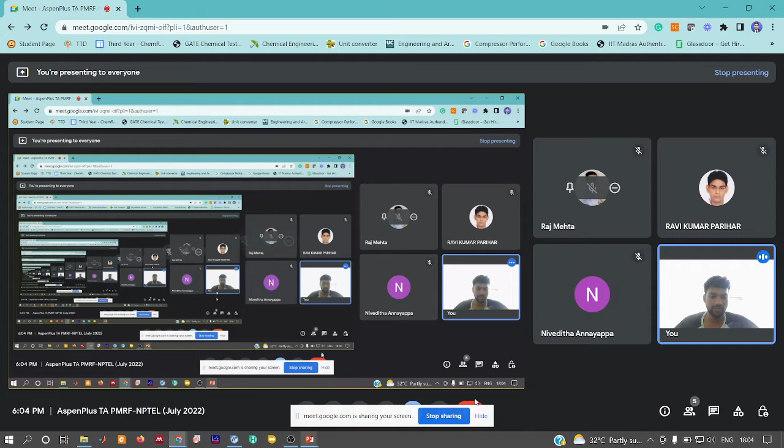Okay fine. So before going to the lecture, do you have any topic which you want me to discuss with respect to Aspen? Anyone? Do you have any specific thing which you want me to discuss? Any response? I see, if you don't respond, by default I'll assume that everything is clear and you are able to solve all the assignments fine.

That's alright, yes, so I'll just do what I had planned. So I welcome you to the seventh lecture of this interactive session. It will be good if you have Aspen with you now and are able to do it. I actually plan to take up the example where we stopped last week, the air separation plant, thought of continuing it, but in case you don't have it as of now, what I'll do is...

I'll just show you the procedure. Anyways, this is getting recorded, so later on as well you can try it out. So, regarding the assignment problem, someone says, when is the due date for assignment 2 or assignment 7? Assignment 7 - because I haven't actually seen these assignments, it's due tomorrow, right? So in that case I'm not allowed to discuss it, but I can discuss it the coming week.

So you have trouble solving those questions, or the question itself is wrong? What was the issue?

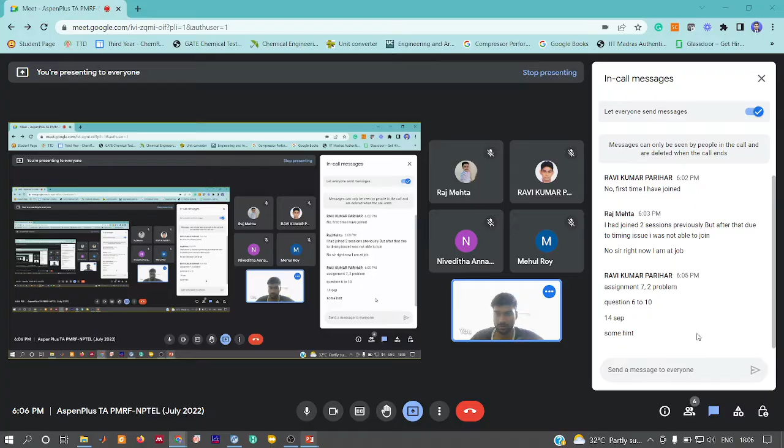So what the professor was discussing this week is he took 3 different problems, trying to show how do we simulate, set up the flow sheet, and identify the variables. In some cases it happens that we know the input of all the components. However, generally when you have the role of a process designer, your input is the required quantity from the process.

So let's say, for example, talking of the same air separation plant, I want 1 ton of liquid nitrogen per day - let's just assume the output is specified. Now for the given output, we need to design the required input conditions, flow rates, operating conditions, everything else. Although in most textbook problems the inputs are available, in real life we are only given the outputs.

So the professor started one way - he gave all the inputs and asked you to calculate the output. In some cases he used the concept of design spec and sensitivity analysis to find out how the output variables vary as a function of input variables.

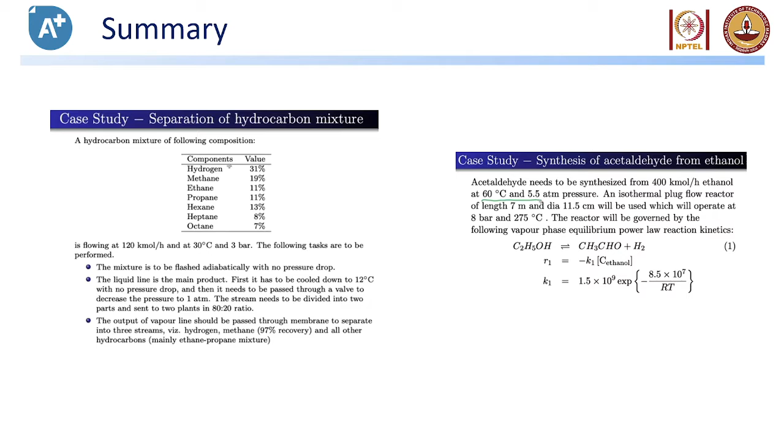So one was separation of hydrocarbon mixture, then preparation of acetaldehyde from ethanol, and another distillation process. That's what the professor has been discussing this week.

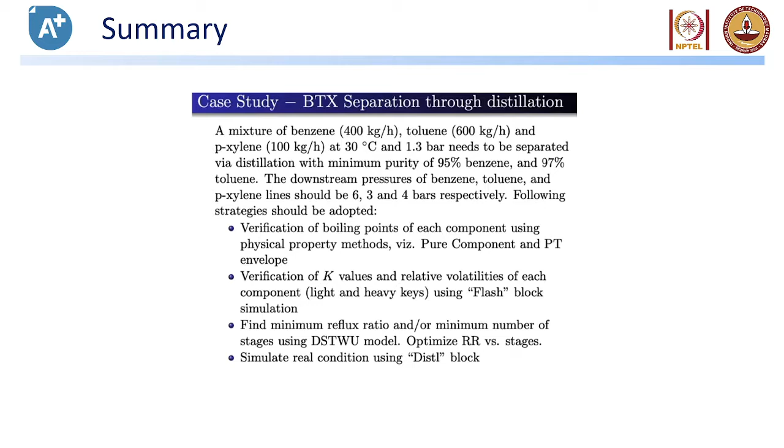So what I had planned was to have very few questions - these will give me a message that you are going through the lectures and are able to follow them. So I have one question. One of the concepts the professor discussed is membrane separation. I want you to answer whether Aspen Plus has an inbuilt module for solving membrane separation processes - true or false?

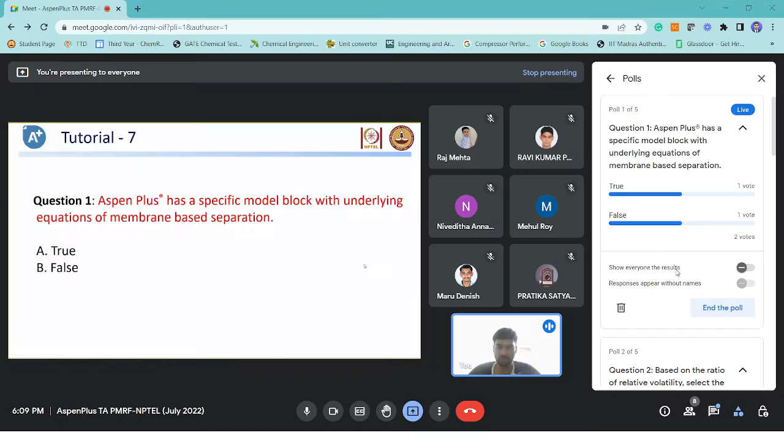Before actually asking this question, how many of you have used Aspen? Can you just put a text that you have used it and are using it often? Yes, someone is raising their hand - you can just put it on the chat box, whatever issue you have.

Okay Mr. Raj, you are using Aspen - so you are clear about the model palettes available in Aspen, right? Okay, thanks for your response. Others? Yes, okay, so only two of you - three out of six, only three of you are using, is it?

Okay, I'll just give you some brief introduction. For those who have not seen the Aspen GUI and all, when you go to the simulation aspect, you'll be able to see the model palettes over here. It can simulate mixers, separators - you can see over here - so separators will have phase separator, two phase separator, three phase separator, and a decanter based on density separation. Then heat exchangers, various kinds.

One is shell and tube heat exchanger, which can carry only two streams - that's called HeatX. The heat exchanger which can carry multi-stream, more than one hot stream or more than one cold stream - if you have such a system, that's called a multi-stream heat exchanger, MHeatX.

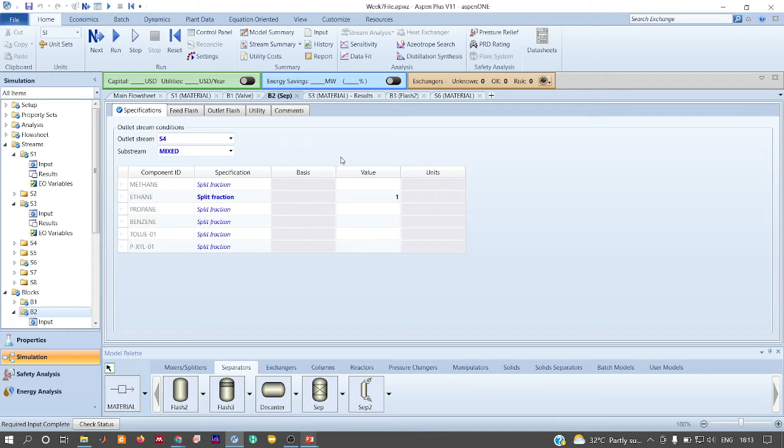So although Aspen has got tens of modules, it doesn't have a membrane separation model, right? Yes. So the answer is false. We are just physically giving it the separation and assuming that there exists a membrane which will give us that output. So it's all physically done. However, there is no mathematical model at the back of Aspen which can solve this membrane separation process.

Okay, fine. So I have another question. Whoever has Aspen with you as of now, I hope you should be able to answer this question. And by the way, I'm asking once again, does any one of you have Aspen with you now? Maybe one at least. Okay, I can see some of you. Wow, that's great.

Then in that case, can you just open the Aspen file and give me an answer for this? This gives you an idea of how we calculate boiling points of pure components. Can you just open Aspen and answer this question based on boiling point, basically volatility, right? So I'm asking, the boiling point is available.

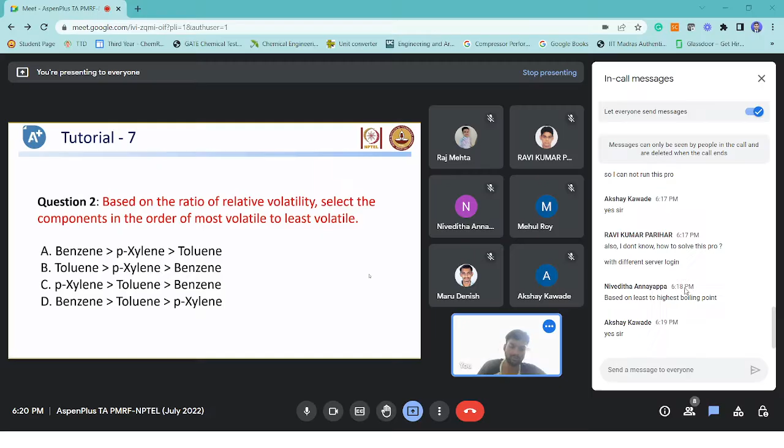Okay, fine. I'll just show you how we do this. See, once we define, the first step is to give the components, right? So see, I already gave the components: benzene, toluene, p-xylene, right? After that we specify the method we are using. It can be any method. As of now I'm using NRTL-RK, but it can be any other method as well, because it's just a prediction, right?

So now the next step: on the right side top you can see the pure component, binary, mixture, solubility, PT envelope, etc. Since we have only one component, let's try with pure. Now what do we want to measure? In this case we were looking for dew point, right? If someone is interested in finding density or volume, etc., you should be able to read the properties.

Once you put your cursor on the symbol which Aspen is using, you can read what it means. For example, mass density of a pure component, similarly isentropic exponent of pure component, mass enthalpy, ideal gas enthalpy, etc. So from this we will be able to calculate properties of different things.

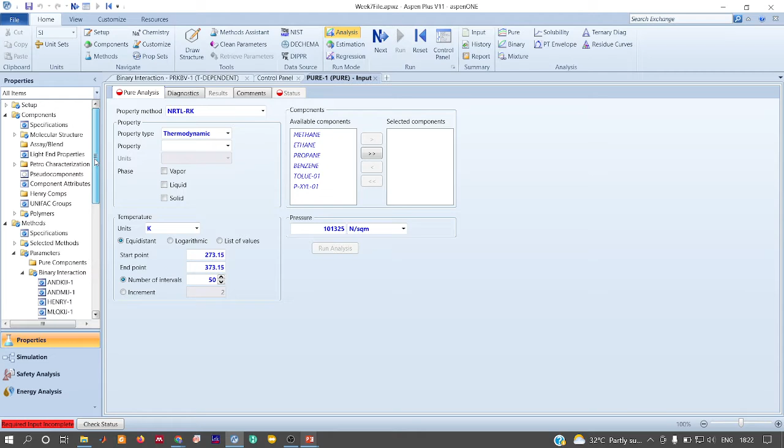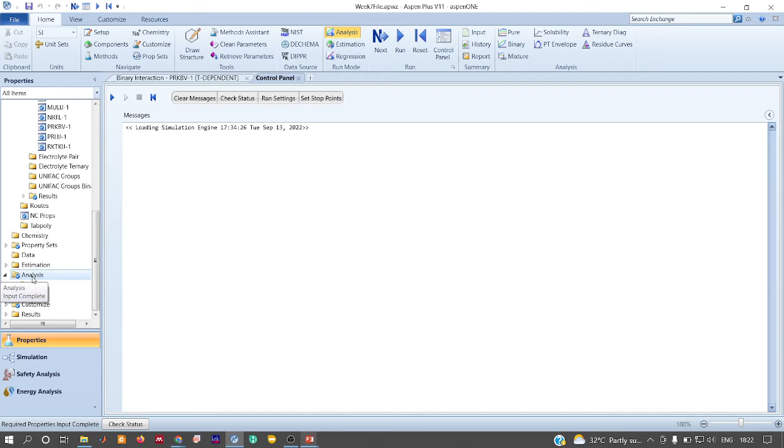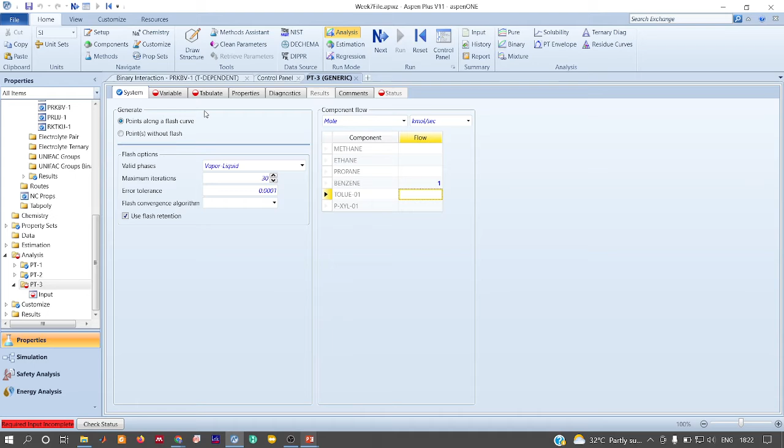However, now we are interested in finding out the boiling point at 1 atmosphere. So I'll show you another method. Let me just delete this pure analysis I have shown you; in case you want to find other properties, it will be useful. Just go to analysis, click on new. It's generic, right? Now it says I want only one. Essentially, giving a mole flow of 1 for benzene makes it a pure component. I want it at 1 bar.

I don't know who has unmuted, can you just mute yourself if you don't mind? Okay.

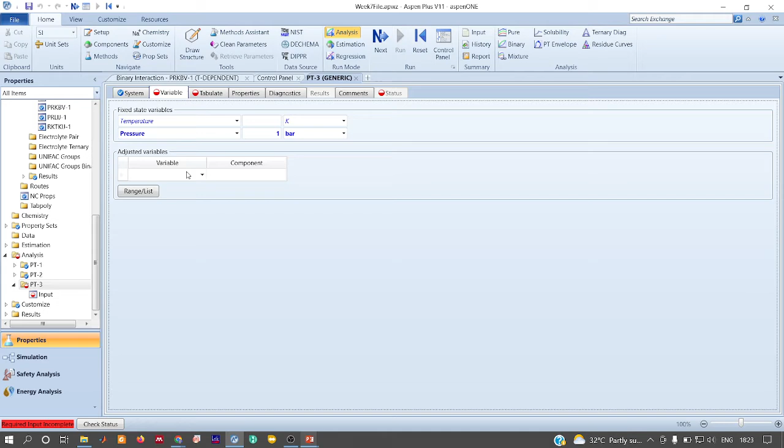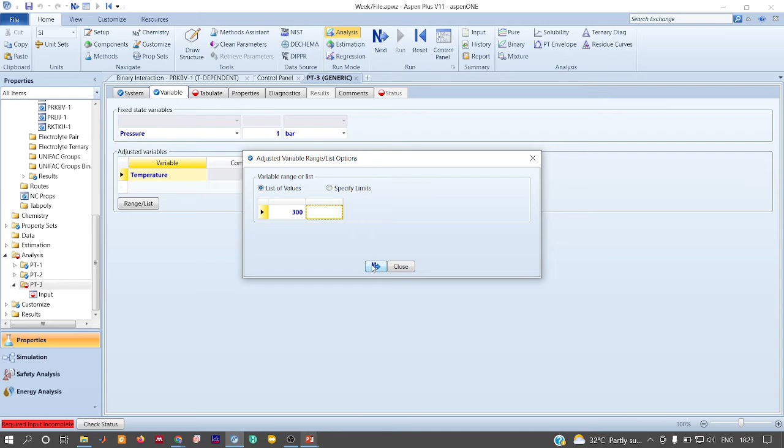So we'll vary temperature. This is just a dummy calculation. I'll say I want it from 20, let me put 150, also 300. Then what do I want to tabulate? The bubble point or dew point. For pure components it doesn't really matter, bubble point and dew point are the same. So let me just run this analysis.

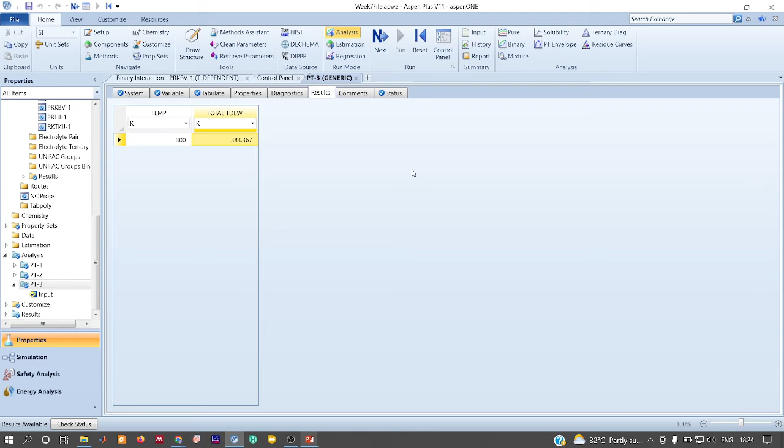See, here we can see that at 1 bar it has a dew point of 352 Kelvin. Similarly we can identify the dew point for others as well. If I remove this and put toluene and run it, now at 1 bar I have a dew point of 383 Kelvin for toluene, and similarly for the other component as well.

Let me delete the other, then run it. See, I have the third one as 411 Kelvin, right? So now I have 3 component boiling points. Since I know the boiling points, I should be able to arrange them based on volatility.

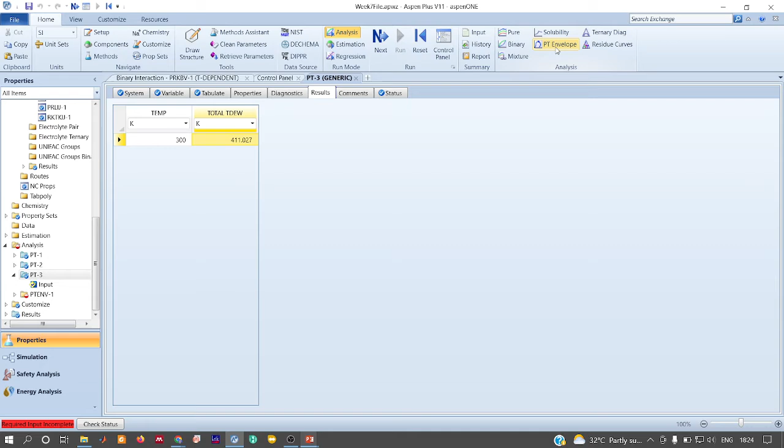Another way of doing it is just to generate this PT envelope. Say I want to generate a PT envelope, I want only this one. I would prefer using the density matching method. Since it's from our own lab, I know what is going on with the density matching method, so I prefer using it.

Once you see the results, it gives you, not dew point, since it's a pure component, it says saturation temperature at various pressures. Since we want it at 1 bar, 1 atmosphere, we can identify that it's 353 Kelvin. So this is another way of doing it. Could you follow what I did for finding boiling point or dew point?

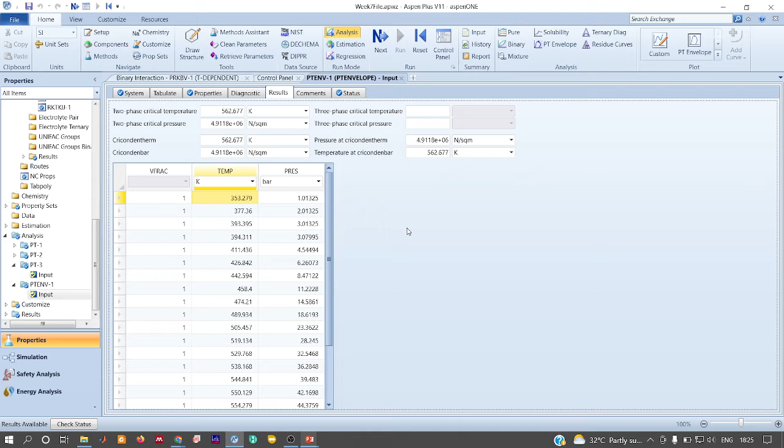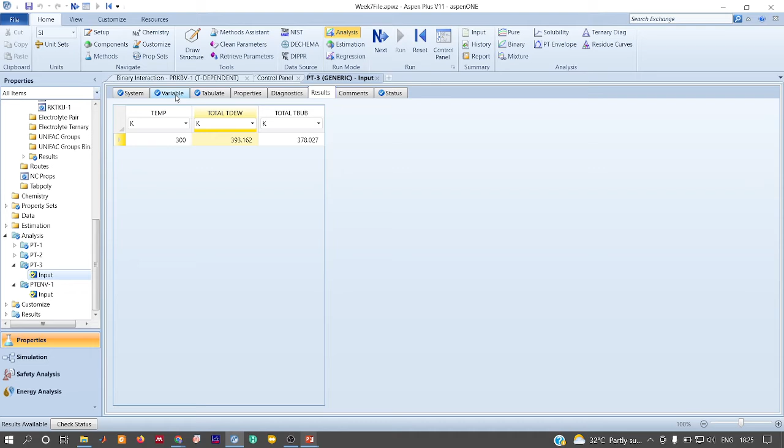In case you are considering a mixture, for example if I want a mixture of 0.3 and let's say 0.4, and I want to know the bubble point and dew point, that will be different, right? For a mixture the bubble point and dew point are not the same. For pure components, both are the same. So this is how you find bubble point and dew point for a pure component or a mixture. For a pure component, it's called boiling point. For a mixture, we call them separately bubble point and dew point. So, is this clear how we find the boiling points of different components and mixtures?

Yes, any other responses? Thanks, Mr. Raj, for your response. For others, is it clear?

Yes, okay, great. Ma'am, what did you miss in the first question? I didn't understand. First question, you say this one, right? So basically, there is no module in Aspen for membrane separation. Okay, so all we do is we physically give the values and assume that there is some membrane somewhere which can be used in this system to get our output. That's the only point which I made in that question.

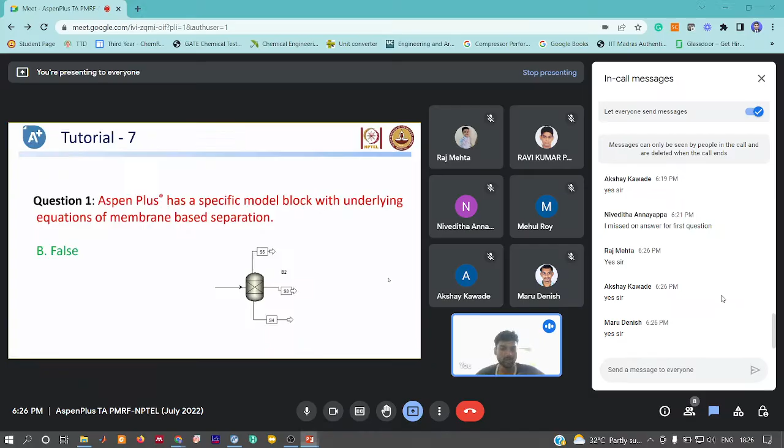Okay, fine. Let me just continue. Okay, now this is one more question. So Fenske equation is the one which is used to calculate minimum number of stages required in the module, DSTWU, whatever module I have shown you. So is it true or false? Just put a poll for this. Give me a second. Yes.

See, today actually I had planned for calculator blocks and optimization tools. Based on time, we'll see whether we'll be able to start those or we'll have to take up the next class as well.

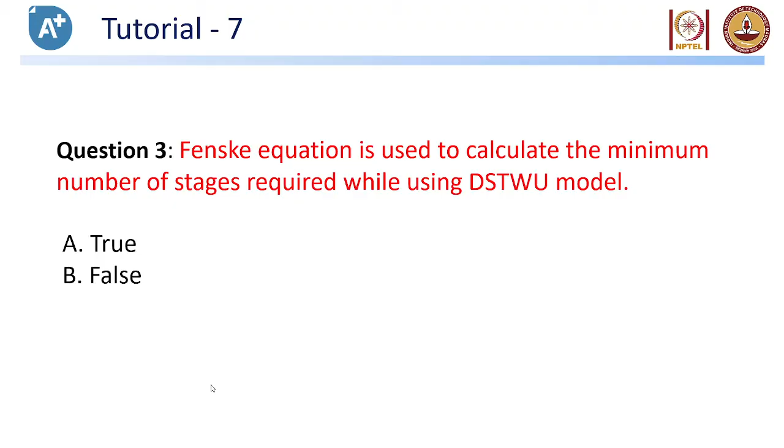All these things are calculated. However, in the case of RadFrac, all these design aspects are needed to be given as input. Okay, so yes, the question whatever I have asked is true, that it calculates minimum number of stages required for separation based on Fenske equation.

Okay, so I have one more question. So Akshay, you have Aspen with you, right? Can you just answer this? Go to the petroleum and petrochemical relevant things in the methods, and can you answer what all property methods are available inside that? Or if any other candidate also has Aspen, they can also just look into it and answer this question. Others, obviously, I don't expect you to remember everything, and it's unfair, right? So, whoever has Aspen, please do answer this question.

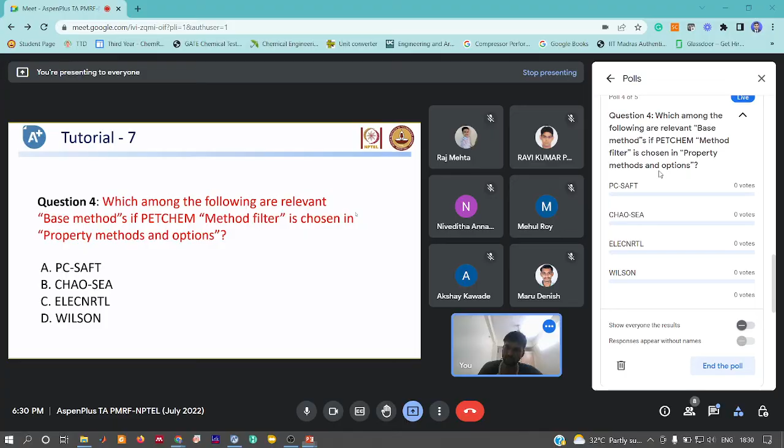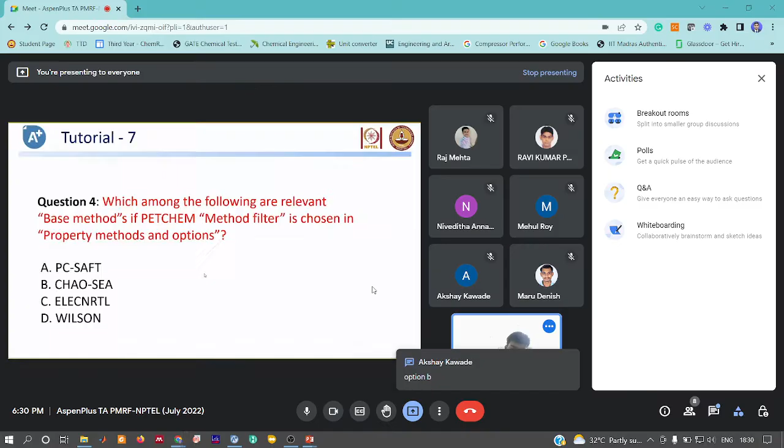Is it Wilson? Don't you see any other property method? Option B. Okay. Any others? So the aim of asking this question is not for you to just go and look. The basic idea is for you to know that whatever property method we are using is just a prediction of the experimental thing. Okay, so it's just a prediction, and every prediction will have some amount of deviation.

Among all the models which are proposed in the literature, the models which are able to predict really well for petrochemical things are these ones. So that's the reason they have specifically put these under petrochemical property evaluations. If you just point your pointer on the method which they have shown here, you will be able to see in depth what it uses. If you want to read more details, you can just go to help of Aspen, and there you will be able to find out what the method is actually using.

Okay, so yes, the aim of this question is for you to know that everything you'll be able to see over here. See, if I want to use something else, I'll say RK something. Okay, that's all. See, under this I was able to get both, this one as well as Wilson as well. Yes, that's the answer.

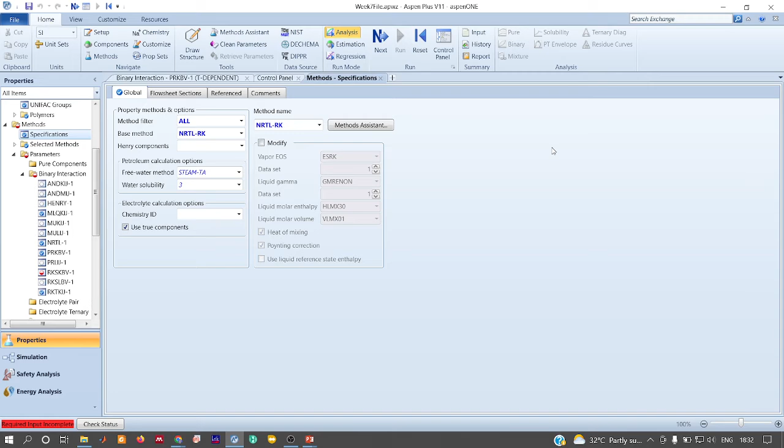Okay, thanks for the response. You are correct, it's actually the Flash2. So if you go here, if you just pull it down, you'll be able to see what is this under the flash. The input it is asking is exactly the same information we give for the flash calculation option. Okay, so that's what it is. Fine, thanks for the responses.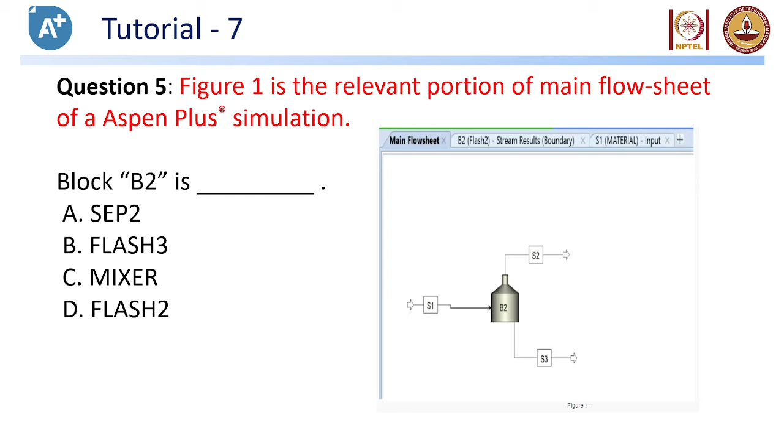Okay, so this is where we stopped last class, right? So we said we're going to simulate the entire flow sheet. However, we just started with the cold section of the process. So what I planned for today's class is we'll simulate the heat exchanger part, the heat exchanger and the expander part. That's what I had thought of doing today.

So yes, Akshay, could you finish this assignment we started last week? You were present in the last class, right? I think you're the only one who attended 2 days in the previous session as well. Could you finish this one? Or at least you understood the way we are proceeding, right? That's also fine. Could you follow this?

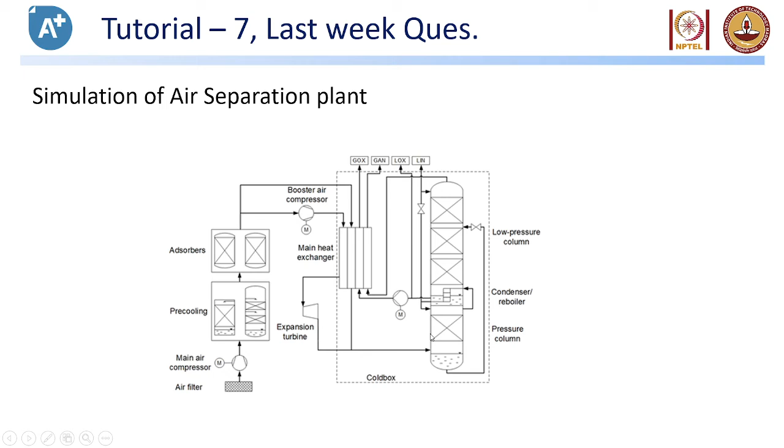For others who have come just today, I'll just explain what we were doing. The aim of the overall assignment is to simulate the air separation plant. So we said let us divide the entire plant into 3 sections and simulate them separately: the cold end, the heat exchanger section, and the double column separation setup. Last class I was trying to simulate this cold turbine.

So the liquid yield is defined as the ratio of whatever is getting liquefied to whatever is being expanded through the turbine. So basically it's m7 by m5 in this figure. I wanted candidates to find the temperature T5 for various pressures such that I have a yield of 0.6, 0.7, etc., given the outlet pressure of the turbine, state 6, is 1 bar. One using sensitivity analysis and another using design spec. I'll show you how we proceeded.

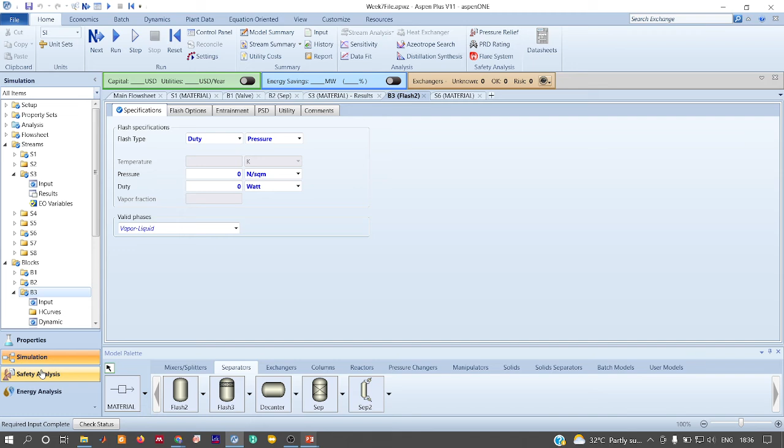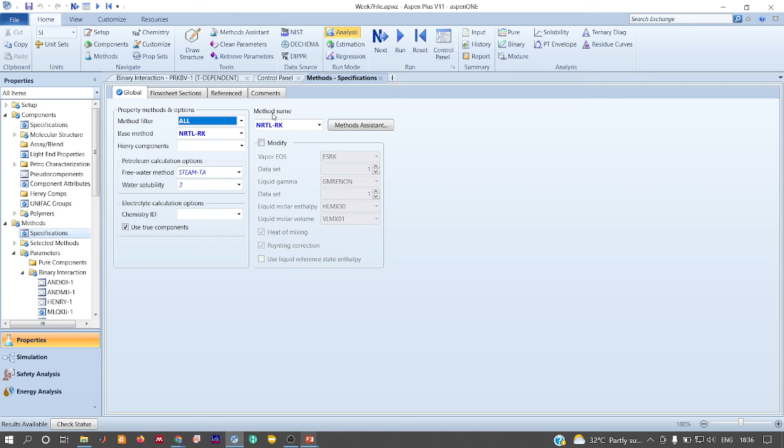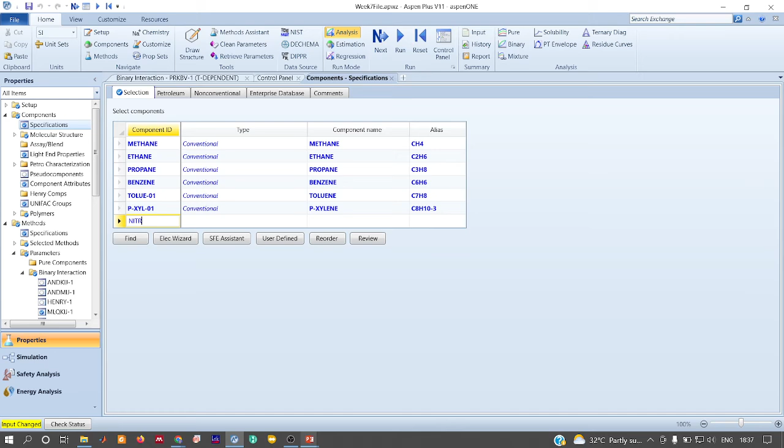Let me just make it faster. Where are these pressure changers? Yes. For air, I would prefer choosing the Peng-Robinson equation of state; it predicts really well. Then pressure changers, then I have a separator, then some inlet and outlet over here. Let me take 40 bar just as an example. It's 1 kilomole, and I don't have nitrogen, so I'll have to add it. Great. So this is one.

Okay, you're facing issues with sensitivity analysis. Actually, you'll get errors while you are performing sensitivity analysis. The objective of the question was for you to learn how to handle the errors, so the question was made such that you will get errors.

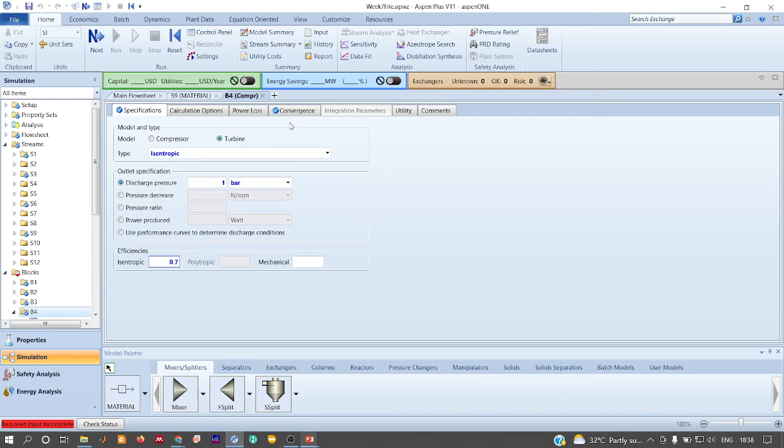The question says the outlet pressure is 1 bar and the isentropic efficiency of the turbine is 70%. So that's what I gave, and I'm using the Peng-Robinson equation of state. Since it's a two-phase expansion, I went to convergence and changed the valid phases from vapor only to vapor and liquid. That's the only change I made. For the flash separator, heat duty is 0 and pressure drop is also assumed to be 0.

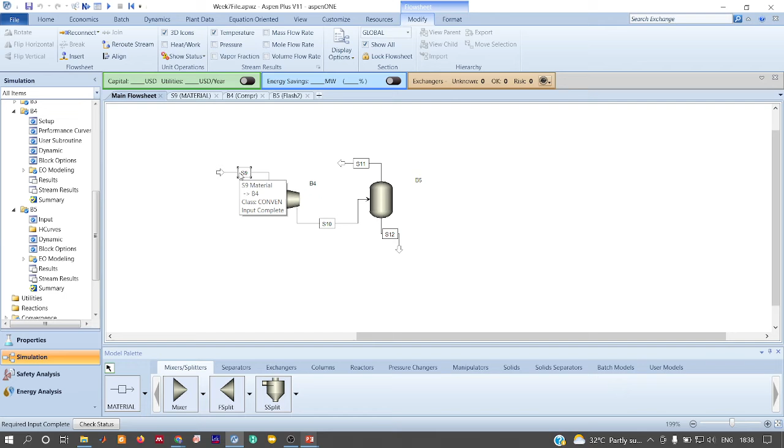Let me rename this as 5, using the same nomenclature: 6, 7, 8. So that's the setup, and then I asked you to perform a sensitivity analysis. How do we do it? You'll see this model analysis tool over here. Just go to sensitivity, that's all.

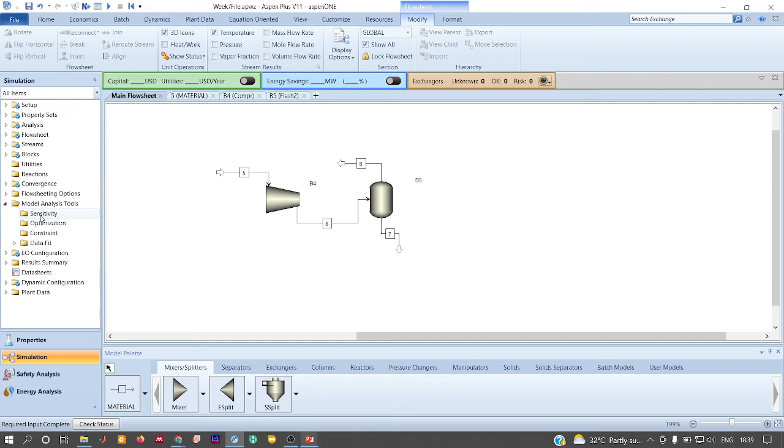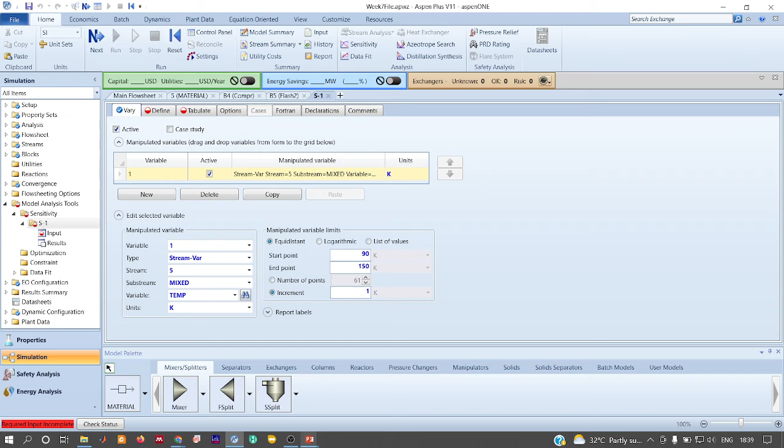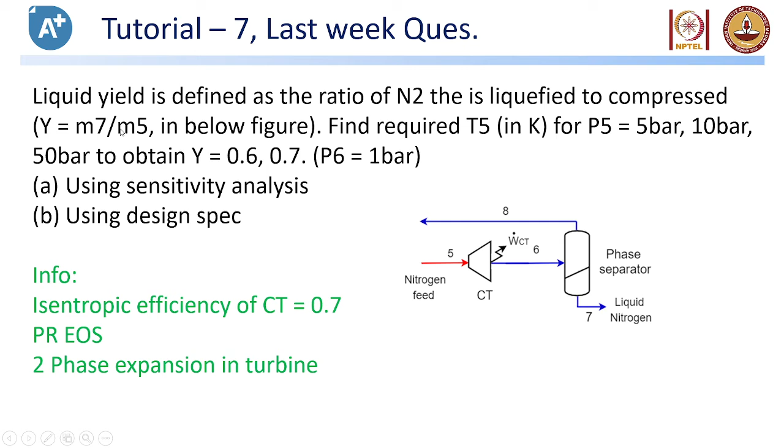Click new. Here I want to vary my inlet stream temperature, so it's a stream variable. The stream I want to vary is 5, and the variable is temperature, from 90 to 150 K with an increment of 1 Kelvin. Since my inlet flow rate is 1 kilomole per second, the denominator of the expression is already 1, so finding the outlet flow rate is sufficient.

So this is M7. It's a stream variable since we are talking of the stream flow rate: stream 7, mole flow. That's all. So let us see how the liquid flow rate varies with respect to temperature. Let me plot it.

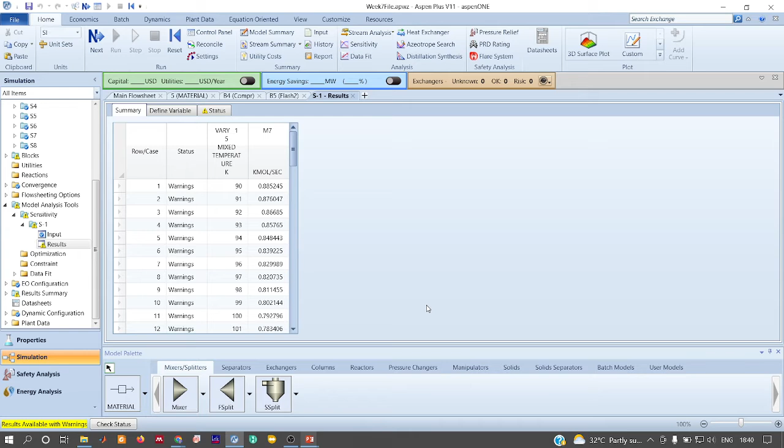So yes, here we are able to see that for 40 bar, as we decrease the inlet temperature of the cryoturbine, obviously the yield which we get from the expansion will increase, right? So this is what I was asking you to do, however at different pressures, okay, 5 bar, 10 bar, 50 bar, etc. As of now, just as an example, I took 40 bar.

Okay. So is sensitivity analysis clear? How did we do the sensitivity analysis? Is it clear for everyone? See, if you do it with your hand, then the questions come out naturally. Okay. So next class, it will be good if you can join the session with Aspen. That will be really great. Anyone else? Could you follow what I did with sensitivity analysis? Only two others. Thanks for your responses, by the way.

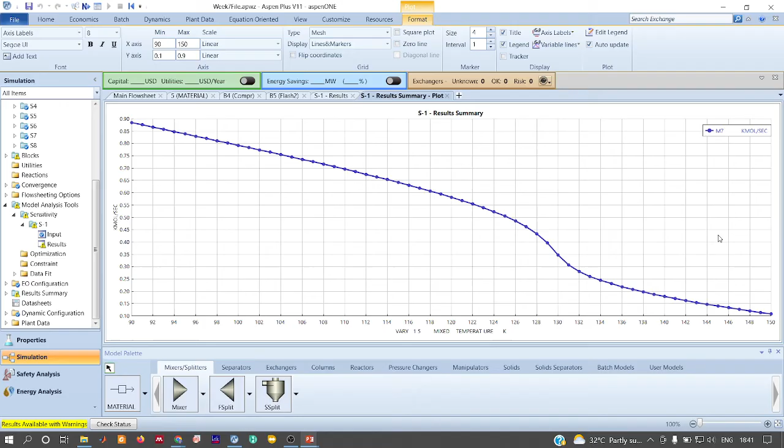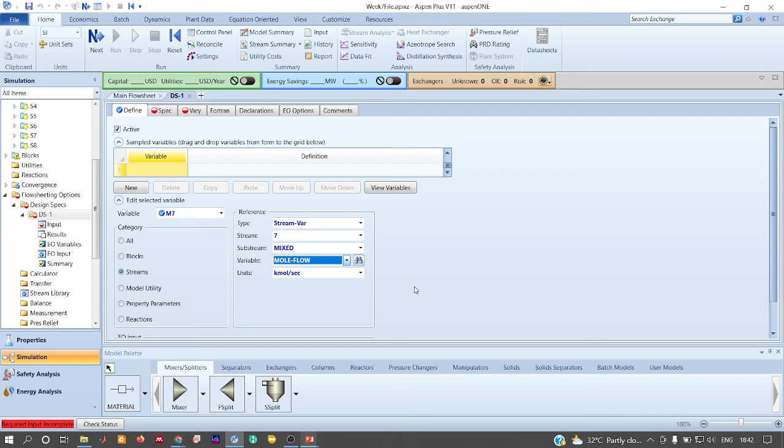And then let me show you design spec as well, for others who didn't solve that question. So design spec is available in flowsheeting options. Once you close this, I want a new design spec. So I'll define M7. What I'm targeting is I want the flow rate of stream 7 to be 70%. So I'll say M7, fix this to be 70%. I'm okay with having a tolerance of 0.001.

And what to vary? You vary inlet temperature, right? Since it's a temperature, it's a stream variable. Stream 5 is what we are looking for. The temperature varies from 90 Kelvin to 150 Kelvin, since I don't know at what location it falls. That's all done. You will be able to see that it says the required input is complete.

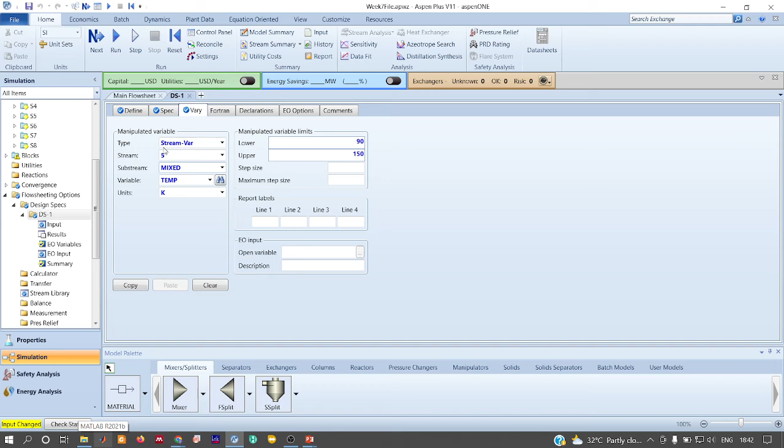Let's run this. See, the design spec has already found a solution. It says when my inlet temperature is 109.58 Kelvin, I'm able to get approximately 0.7. So it's within the tolerance which I have mentioned to the problem. So that is what design spec does. It's like a control loop. Okay.

A feedback control system, whatever you study in your process control course: based on the output, it will manipulate the input variable. So it's like having a control loop on top of your system. That's what design spec does. Okay. So is everything clear with respect to design spec? How did we vary the input variable to match our output? Will you be able to solve it in future?

Can anyone respond? Were you able to follow? Others? Only two of you are responding. Others, could you follow? Okay, fine. That's great. Let us continue.

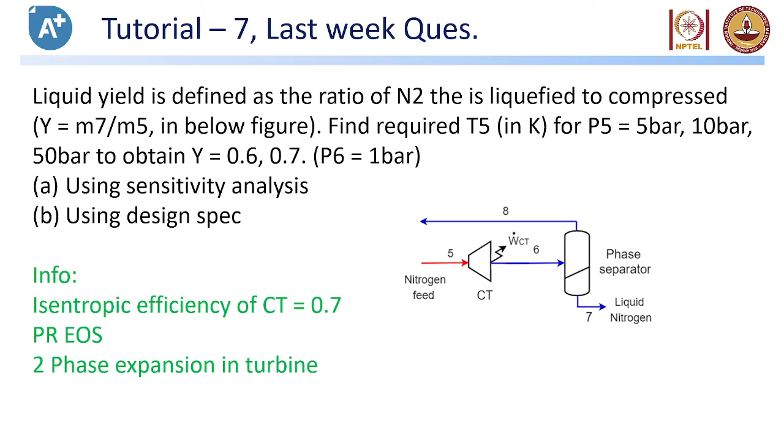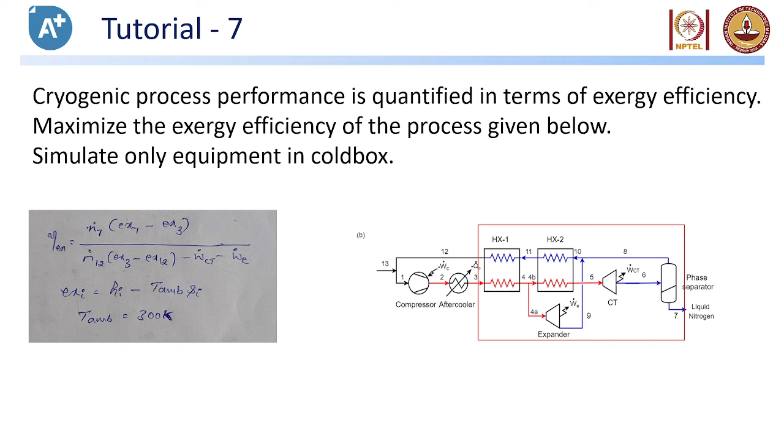So this is what I did last week. What I thought of actually doing is simulating the liquefaction cycle. So this is what we'll get started with. We may not be able to finish it completely today, but how many of you have Aspen now, except Akshay? Only Akshay has Aspen with him, or anyone else who has joined late? Okay, one more has. Great. So three of you have, right? That's great. We'll start with it.

See, the liquefaction process. Before sending it to the distillation column, we need to bring it to two phase. For components which have boiling points close to ambient temperature, it's a bit easy to have them in two phase. However, in an air separation plant, the major components are nitrogen, oxygen, argon, right? They have boiling points between 77 Kelvin and 90 Kelvin. So we need to bring the temperature down from 300 Kelvin to about 90 Kelvin before sending it to the distillation column, so that the entire thing is a two-phase system.

So for that, various kinds of refrigeration processes are used. One such process is shown over here. This is called the Kapitsa process. Air is compressed and sent to the aftercooler. Then we have a set of heat exchangers, and from between the heat exchangers a part of the compressed air is expanded to a lower pressure using a turbine.